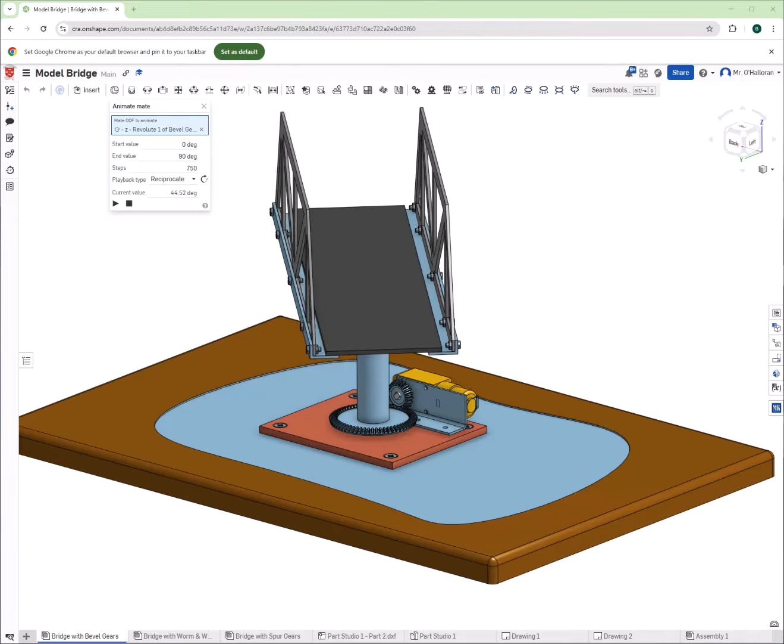So today's video is looking at a junior cycle technology project and how we might use different mechanisms to get some motion in the project. Now this is going to be a two-part series. This is just going to be a short video looking at the three different examples that I've modeled. I've modeled one with bevel gears, one with normal spur gears, and one with a worm and worm wheel.

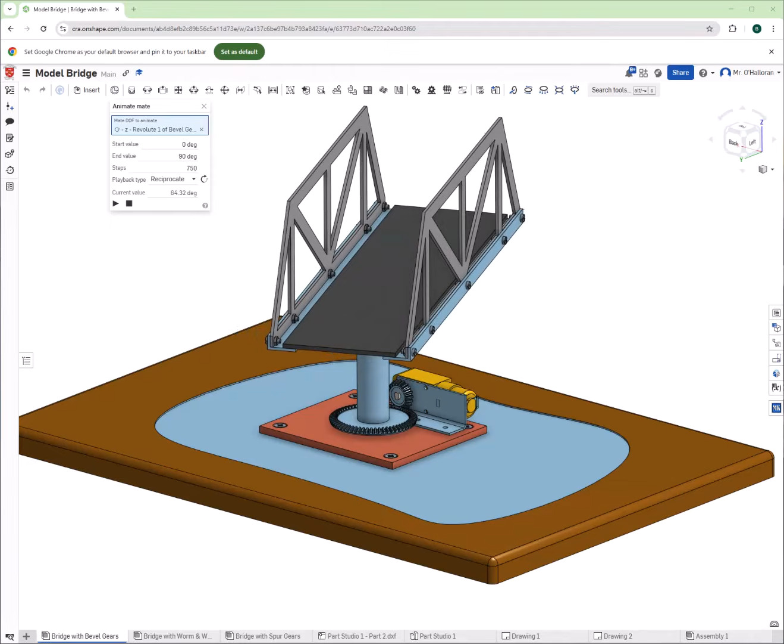What I'm going to do in the second video is I'm going to showcase how you can very easily get these mechanisms and drop them into your project. So if you, the student, are modeling a junior cycle project or Leaving Cert project, you'll be able to get the motion working very, very easily. And that is often the hardest part of these projects, when you have moving parts.

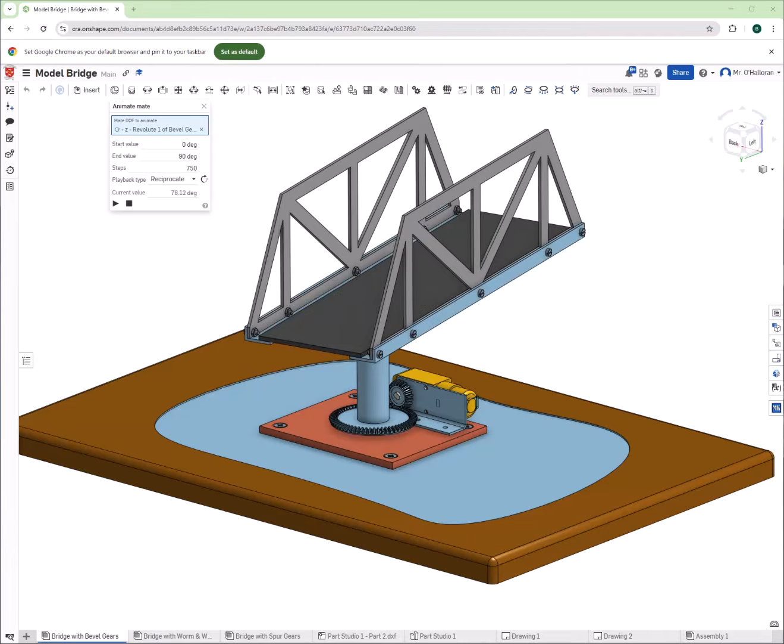So that's the goal. So today I'm just going to take a quick look at these three examples that I've done. So this first example is obviously using bevel gears, and if we take a look, we can see that the stem of the bridge, or the shaft here, is connected onto this bevel gear, and that would all be 3D printed as one part.

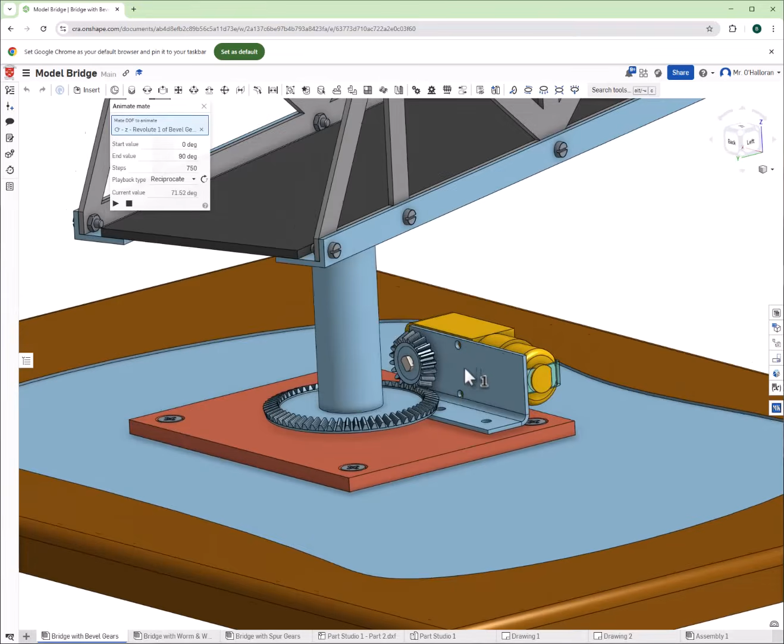And this gear over here on the motor is also going to be 3D printed. So we know that they're going to link up together, they're going to work, everything's going to be in the right position. So it takes a lot of the hassle out of it. So that's the first example.

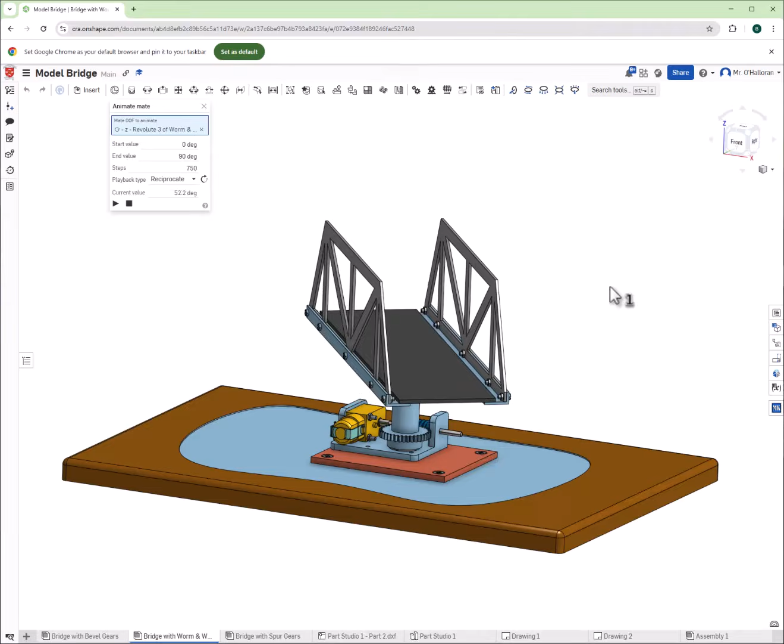So I've just pulled up the second example here, and on the second example you can see that we have a worm and worm wheel. So if we just rotate this around and maybe look in at it a little bit, we can see we have the worm and worm wheel mechanism there, and that's opening and closing our bridge.

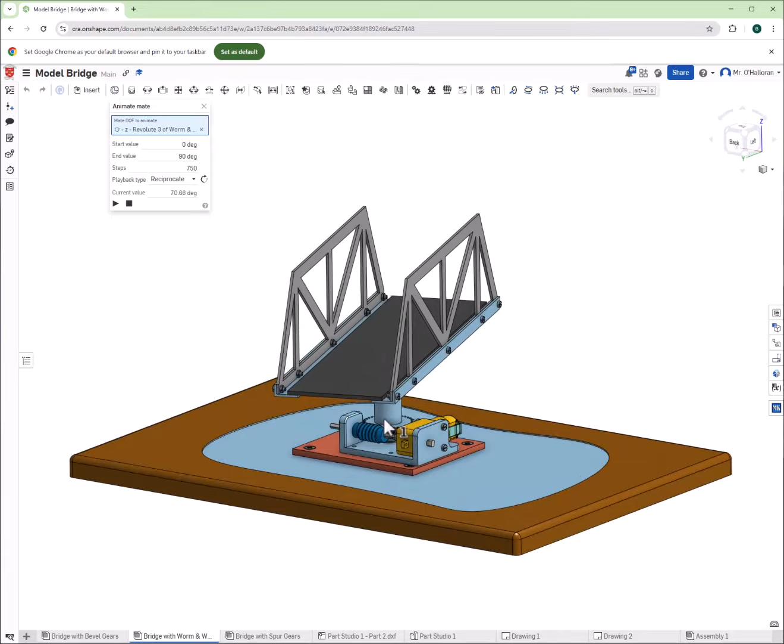Again, the worm gear and this normal spur gear are going to be 3D printed, and the spur gear here, which is linking up with the worm gear, is designed in such a way that it is all 3D printed as one part. And again, there's huge advantages to that.

We know that they're going to be the right size, they're going to mesh correctly with each other, and when we 3D print the bracket also, we know that everything is going to fit. So that's our second mechanism.

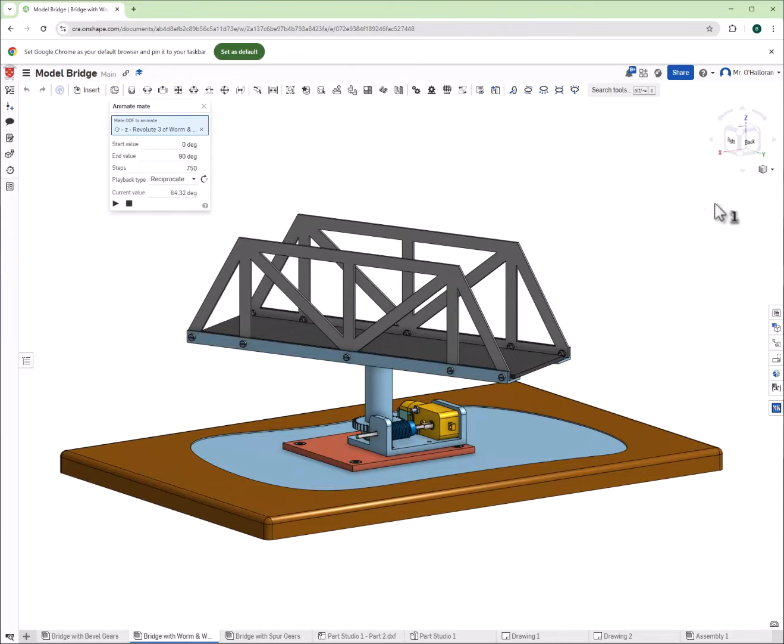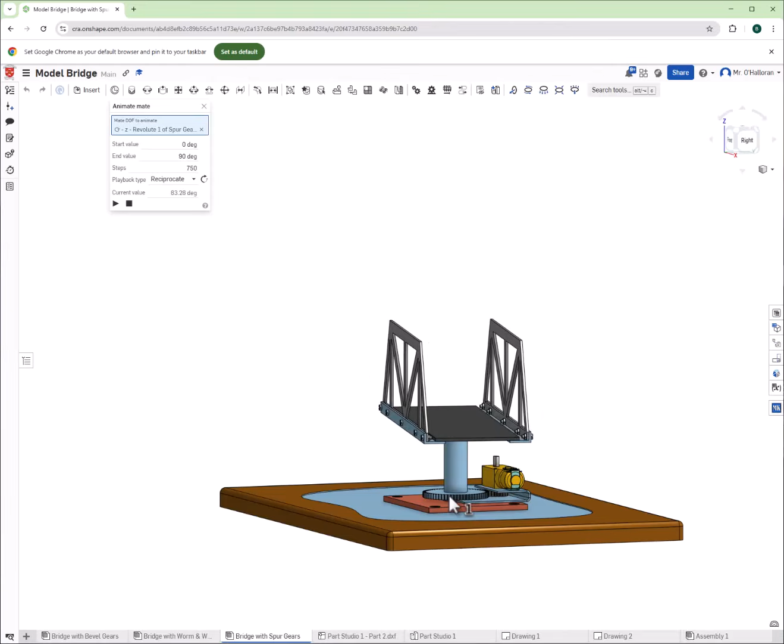As you can see, in all cases the gears are reducing the speed. So you're going from a small gear to a big gear here. Same with the bevel gears, and the worm and worm wheel is automatically reducing the rotation speed and increasing torque.

So as I said, this video is just a very short video. Just wanted to showcase how you might use the one project and maybe incorporate three different examples of how to get the different types of motion.

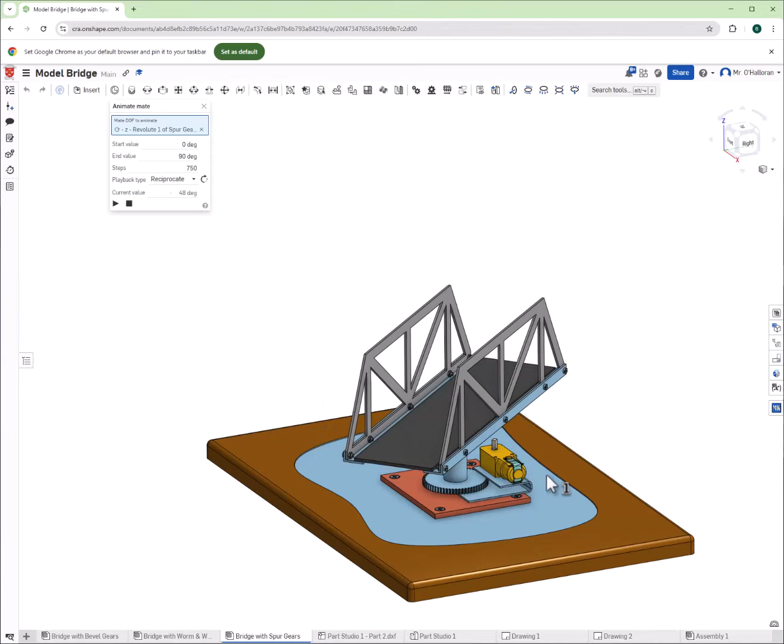In the next video, I'm going to detail how students can insert those mechanisms, but most importantly, how they can modify and adapt those mechanisms to suit the needs of their individual projects. So that's what's going to be coming next.